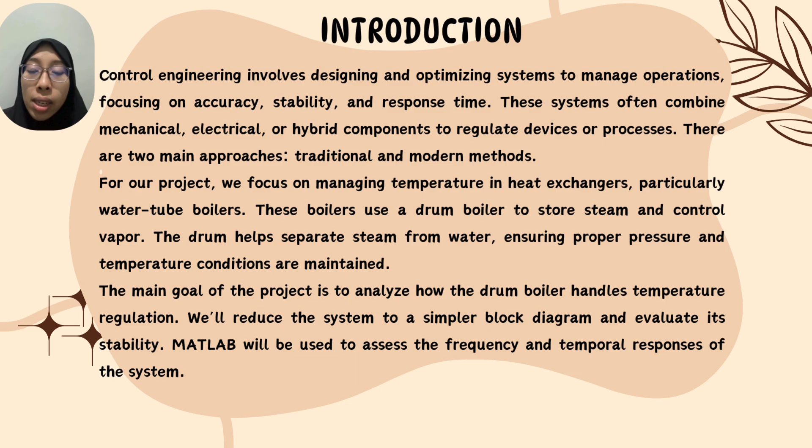The main goal of the project is to analyze how the drum boiler handles temperature regulation. We will reduce the system to a simpler block diagram and evaluate its stability. MATLAB will be used to assess the frequency and temporal response of the system.

For the objectives, in this project we aim to understand the operation of the drum boiler, implement an automated PID temperature control system for a drum boiler, and analyze and enhance the automated system.

The scope of work is limited to the following: complete mathematical computation for the drum boiler, study and compare step response, root locus, bode, and proportional integral derivative (PID) controllers, and use MATLAB for simulation tasks.

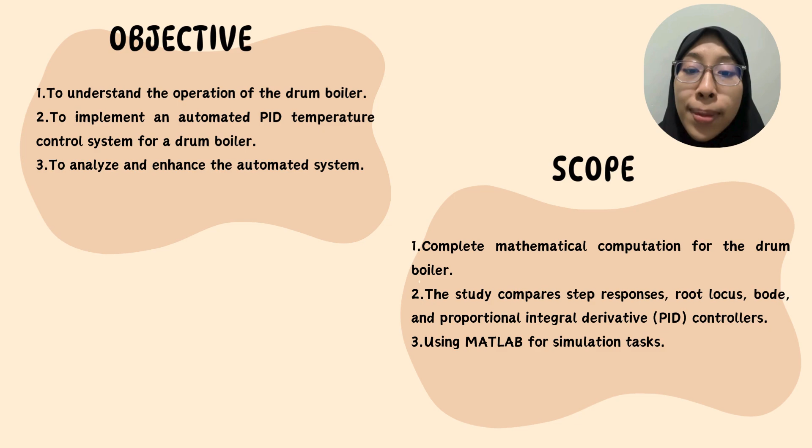I would like to proceed our group presentation with an overview of the literature review. First, precise drum boiler temperature control is vital for safe, efficient power plant operations, since it can create major operational risks including thermal stress, material degradation, and system failures. Temperature deviations can cause thermal stress, which leads to overall system failure.

We also gained some PID controller information. PID controllers are known for their simplicity and reliability, and are widely used with modern optimization techniques like genetic algorithms, enhancing performance by addressing nonlinearities and delays. The Ziegler-Nichols and Cohen-Coon traditional methods establish the initial PID controller parameters, yet modern optimization techniques are also used to allow enhanced precision.

Last but not least, advanced PID methods such as cascade and feed-forward control improve system stability and accuracy overall. Now, a little about the factors affecting the accurate measurement of drum boilers.

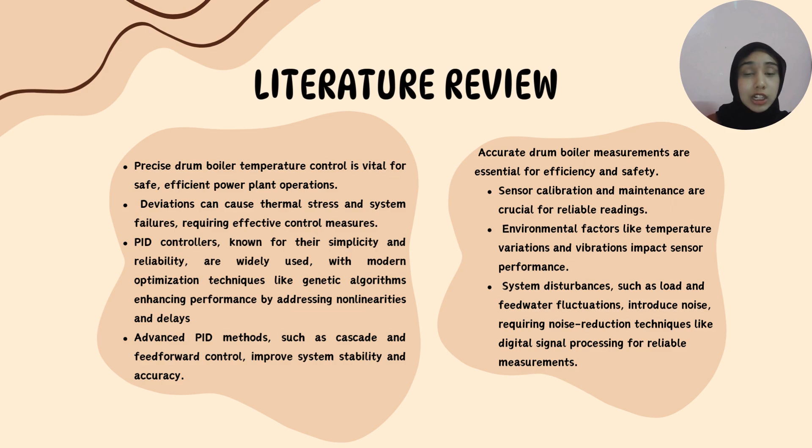First, sensor calibration and maintenance are crucial for reliable readings. Next, environmental factors like temperature variations and vibrations impact sensor performance. Last, system disturbances such as load and feed water fluctuations introduce noise, requiring noise reduction techniques like digital signal processing for reliable measurements.

Next, I would like to present the types of boiler drum level control. The first is the single element module, the second is the two element drum level controller, and the third is the three element drum level controller.

The second one, the two element controller, adjusts feed water flow using steam flow and drum level measurements, refining adjustment with feedback to account for blowdown losses and measurement errors.

Last but not least, the three-element drum level control strategy is used when feed water systems are unstable, relying on drum level, steam flow, and feed water flow to manage variable pressure difference and unpredictable steam demands.

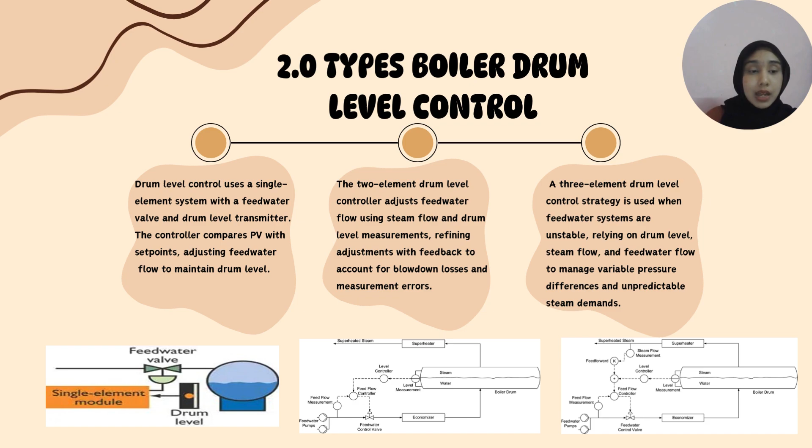The open loop system models explain how the system naturally behaves without any feedback mechanism. It combines the dynamics of the process, actuator, and sensor, which work independently to produce the output. The process is represented as a first order system with a delay, described by the transfer function shown, where n is the final output value, m is the step input, t is the time constant, and td is the delay response.

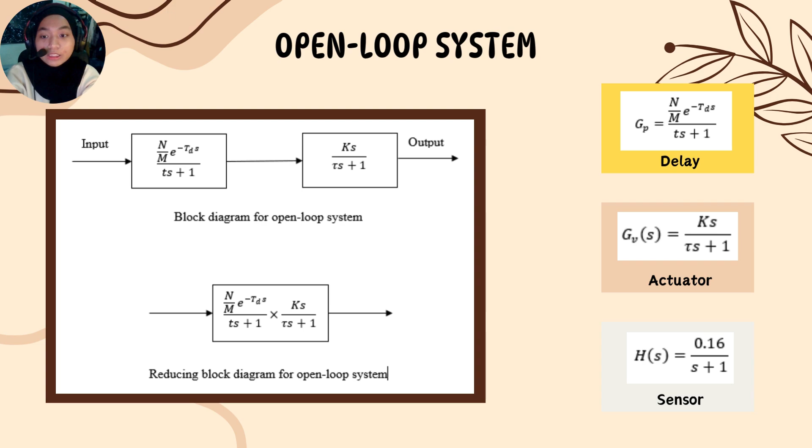The actuator and sensors are modeled separately. These components are then multiplied together to form the complete open loop transfer function, representing the system's unregulated response to an input, where the output depends entirely on the individual dynamics of the components. On the other hand, the closed loop system introduces feedback to ensure the system achieves the desired performance.

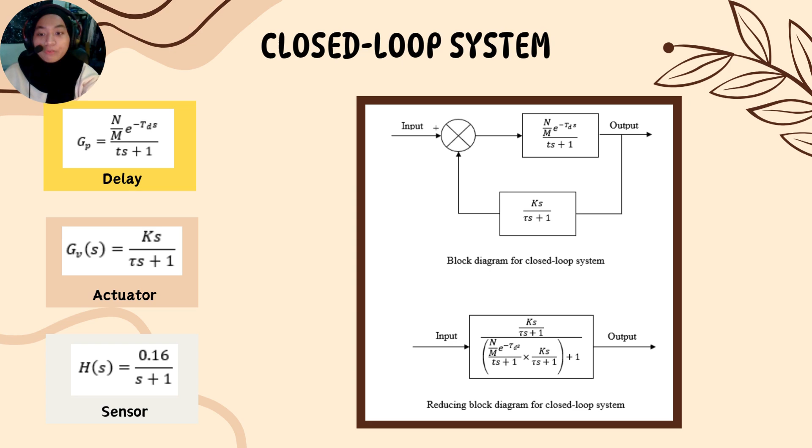Feedback continuously monitors the output, compares it to the desired value, and adjusts the input to reduce any error. This configuration allows the system to self-correct and maintain stability even when disturbances occur. The closed loop transfer function is derived by adding a feedback loop to the open loop model. The feedback mechanism makes the system more robust, providing greater control and stability compared to the open loop system.

To make the equation practical, we substitute the given parameters into the derived transfer function. For both open and closed system, we substitute n equals 46, m equals 50, td equals 0.5, t equals 29, k equals 0.16, and tau equals 1. This simplified transfer function provides a clear mathematical representation of the system behavior in both open and closed loop configurations.

The open loop model reveals the system's unregulated response, while the closed loop model demonstrates how feedback improves performance and stability.

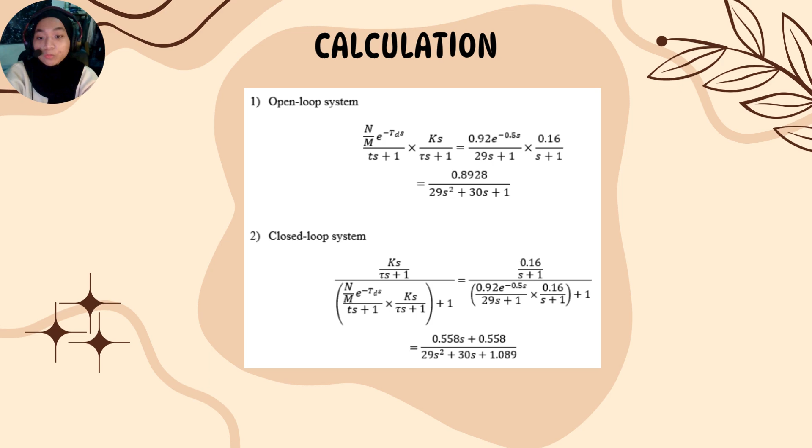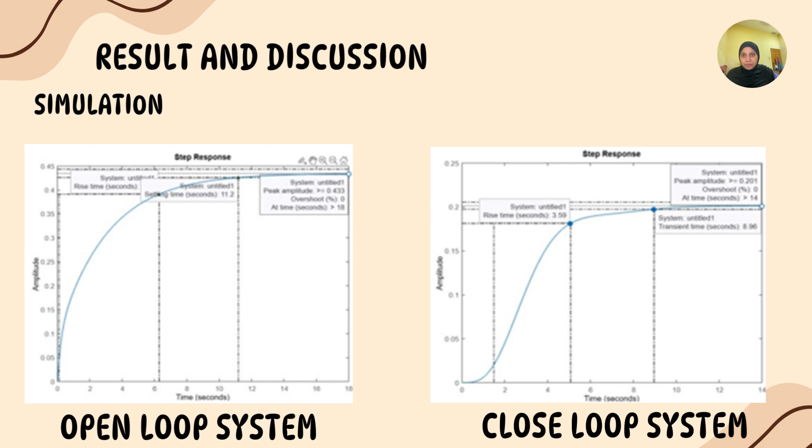The step responses of the open loop and closed loop systems show clear differences. The closed loop system has a faster rise time of 3.59 seconds compared to 6.18 seconds for the open loop system. Its peak amplitude is lower, 0.201 versus 0.433, indicating better control. Additionally, the closed loop system stabilizes quicker with a settling time of 8.96 seconds compared to 11.2 seconds for the open loop system. This highlights the closed loop's superior speed, precision, and stability.

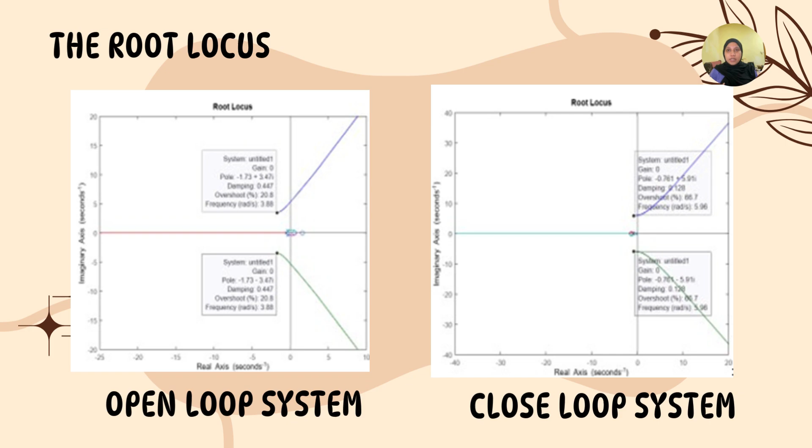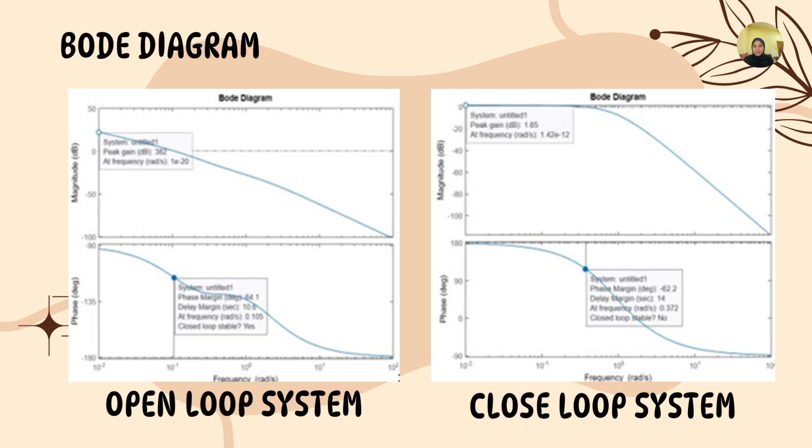In terms of stability, the open loop system is stable at 0.105 rad per second with a phase margin of 64.1 degrees and a delay margin of 10.6 seconds. The closed loop system is unstable at 0.372 rad per second with a phase margin of negative 62.2 degrees and a delay margin of 14 seconds. This result emphasizes the open loop system's better stability compared to the closed loop system.

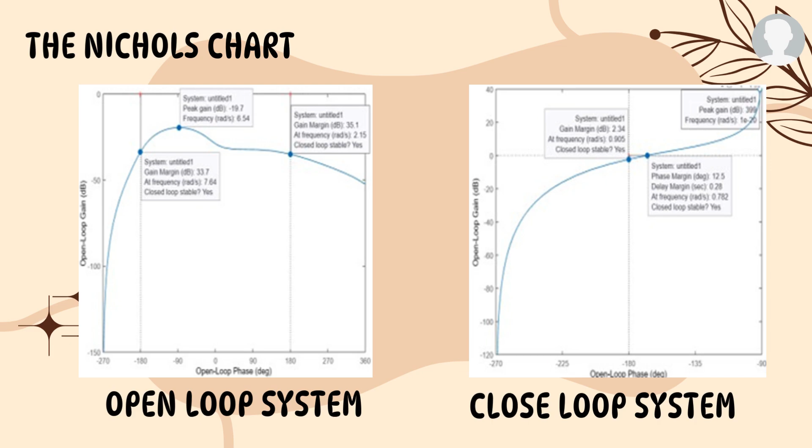According to Nyquist's principle, an analog signal can be accurately recreated if the sampling rate is at least twice the highest frequency, preventing distortion.

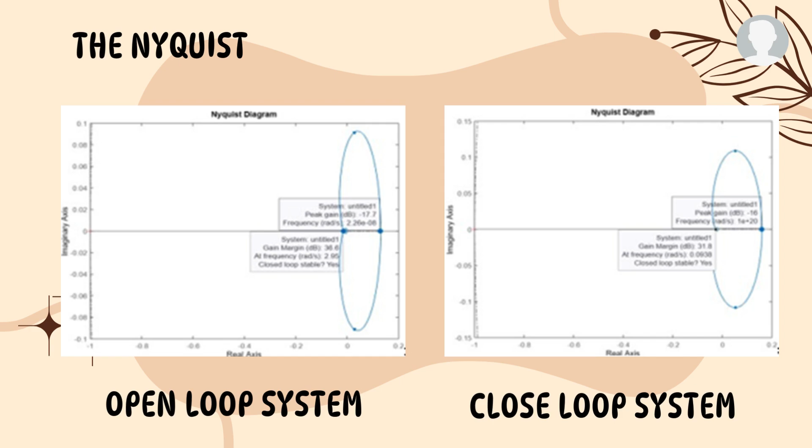The Nyquist diagram for both systems shows that they stay stable across different frequencies. The open loop system has a peak gain of negative 17.7 dB at 2.26 times 10 to the power of negative 8 rad per second, while the closed loop system has negative 16 dB at 1 times 10 to the power of 20 rad per second. Both systems are stable, with the open loop system showing a gain margin of 36.6 dB at 2.95 rad per second, and the closed loop system showing 31.8 dB at 0.0938 rad per second, confirming their stability over their frequency range.

In conclusion, this project successfully used MATLAB to analyze and improve an automated control system. By applying techniques like step response, root locus, Bode plot diagrams, and PID controllers, we gained a better understanding of the system behavior. MATLAB was essential for modeling and simulating complex systems. The project helped identify and solve key issues, improving performance. It also highlights the difference between open loop and closed loop systems, emphasizing the importance of feedback for stability and control. Overall, this project improved our MATLAB skills and provided valuable insights into control theory, setting the stage for future advancement in automation.